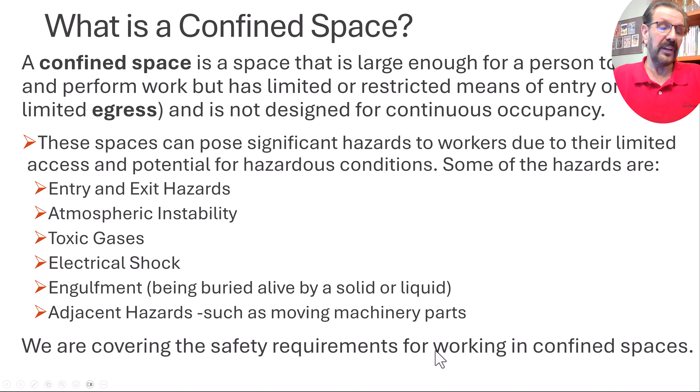Here we are covering the safety requirements for working in confined spaces. So that's our mission. So here you got a couple of people working on a rescue of somebody in a confined space, and that's an important part of this too. So the safety requirements for working in confined spaces. Well, here's that definition again.

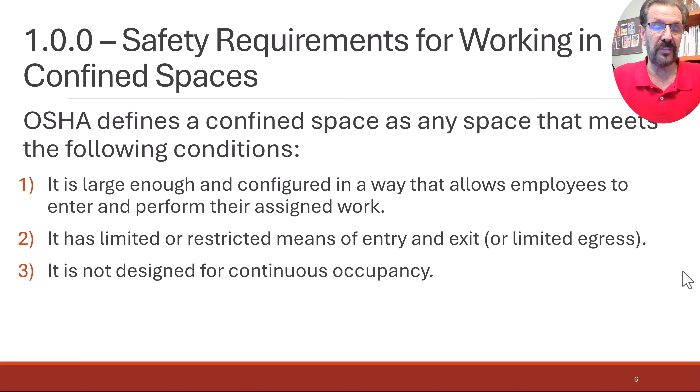Number one, it is large enough and configured in a way that it allows workers to enter and perform their assigned work. Number two, it has limited or restricted means of entry and exit, limited egress. And number three, it is not designed for continuous occupancy.

So examples of working in confined spaces: some of these spaces could be manholes or the spaces around them. You could have boilers, which somebody has to go work inside of. It could be trenches, tunnels, sewers, underground utility vaults. Well, that's really what I was talking about with the manholes, I guess. Pipelines, pits, air ducts, and process vessels.

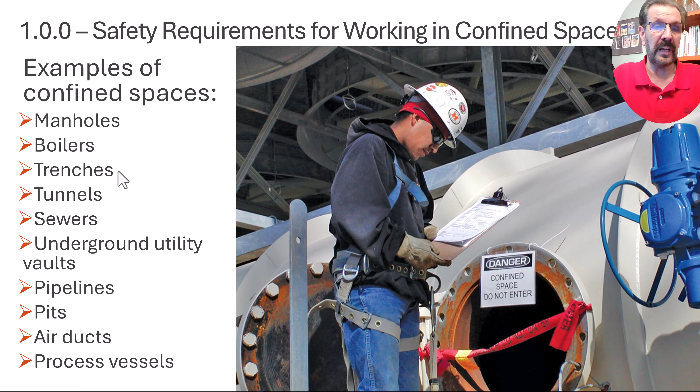Now notice that trenches is in here. We're about to talk about excavations and trenching. Well, trenches particularly, but other excavations too, can be considered a type of confined space. So we'll be discussing that in more detail next. But anyways, there are 2 basic types of confined spaces.

There's a non-permit confined space. That's a workspace free of any atmospheric, physical, electrical, or even mechanical hazards that could possibly cause death or injury. So the non-permit required confined spaces are spaces that are essentially hazard-free. Sometimes that's open to discussion or different opinions. Particularly in the petrochemical industry, a lot of spaces are considered confined spaces that might not be outside of the plants. And the second one is permit required confined spaces.

And yes, there's that abbreviation there for these two, but a permit required confined space is a confined space that has real or possible hazards. So that's the difference. There's real or possible hazards. And who gets to define whether it's a possible hazard or recognize it? Well, that depends. And so we'll get to that.

These hazards can be atmospheric hazards. There could be physical hazards. There could be electrical hazards in that confined space, or mechanical hazards. So therefore, in permit required confined spaces, the space poses real or potential hazards. So as I started to mention a moment ago,

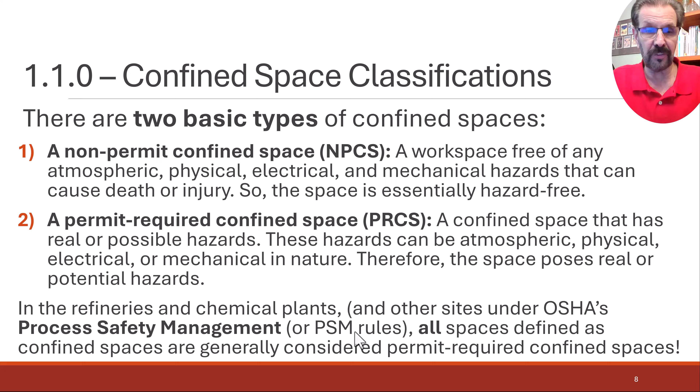So that's where the separation of that comes from. There's nothing keeping you from having a permitting process on other job sites. It just doesn't typically happen. So part of these classifications, this picture might be a good one to look at. You're supposed to have a confined space attendant outside that's managing things from outside, paying attention to what's going on down inside the confined space, down or over, wherever the location is. And then you've got the entrants that are working inside the space.

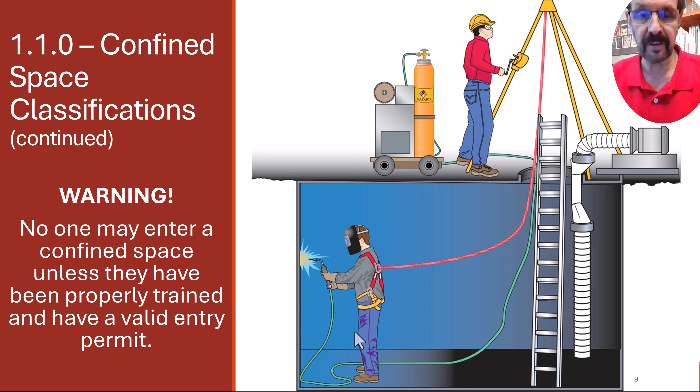And so you have to address the hazards and protect. In this particular picture, there's no respirator being worn by the one that's in there welding, because they've addressed the hazard of the gases, apparently, going by the picture, with ventilation, pushing some air into the space that is then pushing the bad air out. And if you're doing that effectively enough, then maybe that'll work. But that's what we have to address: the air quality issues are maybe one of the most important things.

So what's involved with an entry permit? Well, here are the general things that are required. Generically, there could be other things at a particular plant you're working in. OSHA does not micromanage the confined space entry permit process, but these are things that pretty much have to be on any entry permit. The first one, the description of the space and the type of work that's going to be done. And the next point, the date of the permit and how long it lasts. It usually lasts hours, not days.

The test results. For all atmospheric tests, they need to know the oxygen, they need to know the flammable gases, they need to know the toxic gases or contaminants or materials of any kind that are in those spaces. And that's the preliminary test that would be on that permit. Then you might be doing ongoing testing while people are working in there, and that would not necessarily be on the permit. But meanwhile, you need the name and the signature of the person who did that initial testing.

And then you'll have the list of the workers who are authorized to enter that space. So the people that are actually going to go in that space, their names have to be on the permit when you created the permit to begin with. Over on the second column, you have to have the means by which the workers will communicate with each other within the space and with the confined space attendant.

Any special equipment or procedures that are going to be used in that confined space have to be listed. If you're going to be doing welding, the welding equipment and the welding has to be mentioned on that permit. Any other permits that might be needed. If you're going to be doing welding in a plant, that usually means having a hot work permit for all the spark-inducing heat that could ignite any flammable gases that may be around. And so that could be one of the permits. There could be other permits required. The lockout tagout process, maybe. There could be something else.

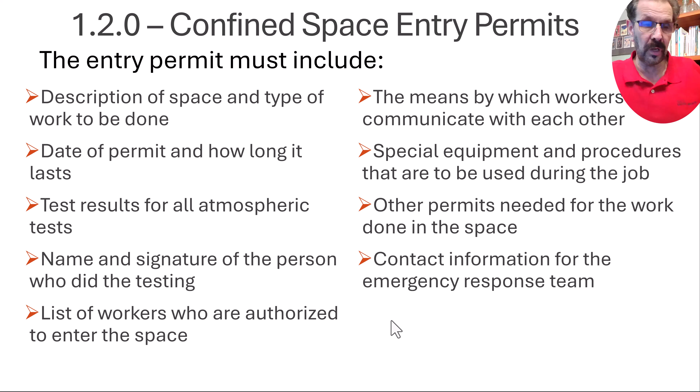And then finally, you have to have the contact information on the permit for the emergency response team. The idea is to have everything thought through that you might need for any possible scenario of hazard that comes along. And of course, this thing all has to have been signed by your supervisor who is managing that process, the confined space supervisor. So if that supervisor is heading off to a meeting somewhere, they shouldn't be the one to sign this thing, because they have to be on site ready to respond when things go wrong, when the confined space attendant hollers out, sounds the horn, whatever.

So that's the basics. Okay, here's a sample confined space permit, 2-page, front and back of it. They can be much more involved than this. This is fairly simplistic, but it's giving you a place to put the initial results from your tests before you ever get the permit signed and approved.

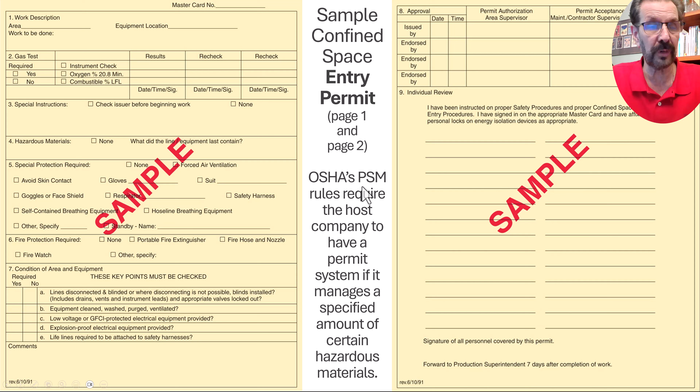OSHA's PSM rules require that the host company have a permitting system if it manages a specified amount of certain hazardous materials. So those are listed right within the OSHA standards. What quantity makes your company have to follow PSM rules?

Okay. Entry into a confined space officially begins when any part of your body passes through the plane of the opening. So sometimes people have been known to make a joke about that, knowing that rule. They stick their big toe in there. "Oh, I'm in the confined space." Ha ha ha. Yeah. And maybe that's not all that dangerous. It probably isn't most of the time.

But if your name isn't on that permit, people have been known to be fired even a week or so later, because we have to treat confined spaces very, very seriously. They're not part of the top fatalities in construction. But the only reason is because we don't spend as much time in confined spaces as we do in other kinds of work. And so that's the only reason they're not in the top 4.

You know that 2 out of the 3 people who die in confined spaces were trying to do rescues. We're trying to perform a rescue of somebody else. They can be traps. They can trap people into going and doing risky things sometimes. So violating those rules can get you fired.

The permit itself must be posted near the entrance of the confined space. When I say the entrance, it's more important that it's the exit too, of course. And the permit must be available for workers to review. So you want to make sure before you go in the confined space that you have read through the permit and you notice that your name is on the permit, that you're allowed to be in there, that you're on the list.

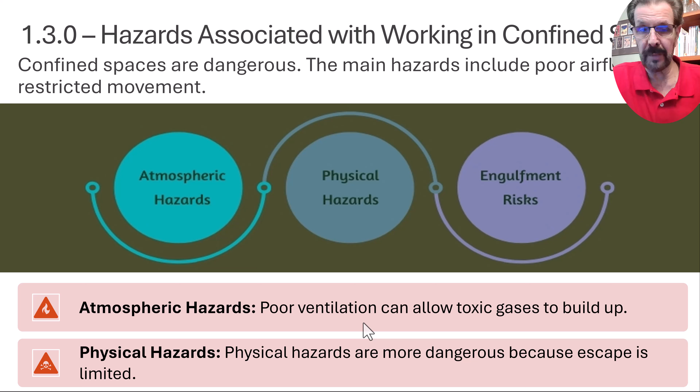So we use atmospheric meters, mostly 4 gas meters. Many of them traditionally have been 4. So atmospheric hazards such as oxygen depletion, or could even be oxygen enrichment. When oxygen in a confined space is reduced, it becomes harder to breathe. But too much oxygen in a space, that's oxygen enrichment, can make things like your clothing way more flammable than they normally would be.

So that can burn you alive, really, because all of a sudden you got a flash fire on yourself. Oxygen isn't flammable itself, but it makes everything way more flammable. And so you want to keep the mixture of oxygen in the air in your space between 19.5% by volume and 23.5% by volume. 20.85% oxygen.

Which is basically 20.9 as you see on the screen. And so we don't need to be that precise.

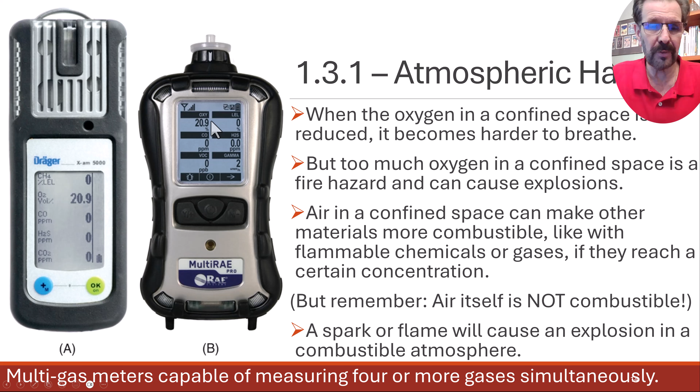Okay, so beyond that, atmospheric hazards: the toxins associated with each product used in a confined space will be found on the safety data sheets. There's other sources like the industrial hygienists have a manual, and there is the NIOSH handbook. These are all handbooks that can be used, but the ultimate guide is the safety data sheet. And so you have to look up the safety data sheet in your safety data sheet catalog or manual that is supposed to be posted at a handy place on your job site where any employee can view it.

Some toxics, such as carbon monoxide, cannot be easily detected by sight or smell. You have to use a meter. They're poison. They may be toxic, but they are not something that you can necessarily smell. So carbon monoxide and carbon dioxide are both examples of that, except that carbon monoxide is 10 times more deadly per percentage than carbon dioxide.

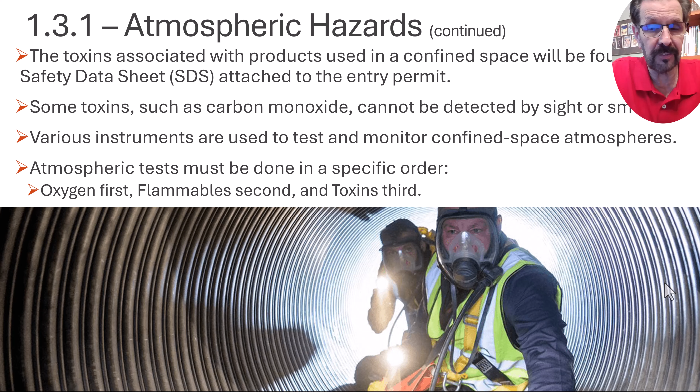So we normally test the atmosphere in this order. You see that in the last bullet and a half here. It says oxygen first, because otherwise what you're reading is not that meaningful on the meter because it's not an accurate reading. So if the oxygen isn't correct, then the flammable gases and the toxins, those numbers won't necessarily be accurate.

Okay, let's see. The physical hazards. Well, electric shock would be a physical hazard. That can occur when power tools and line cords are used in an area of wet floors. There could also be some adjacent hazards of electrical shock that might have to be locked and tagged out.

Purging. That happens when toxic, corrosive, or natural gases enter and mix with the air in a confined space. That can happen from somewhere else within the space. You could have a sludge in the bottom of a big tank that you're in that is emitting gases that are evaporating out, toxic or flammable. And so that can be a problem. It can also be leaking in from somewhere else.

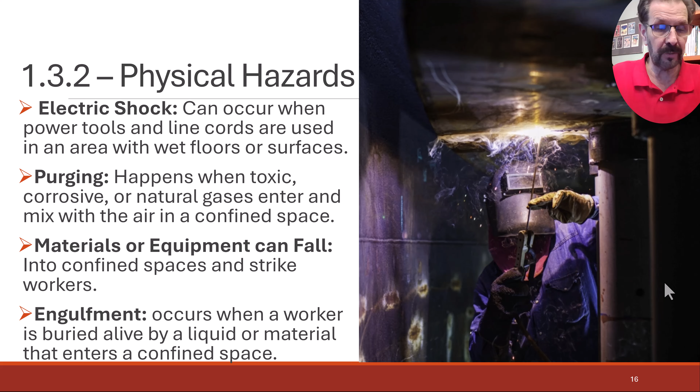Materials or equipment could fall into a confined space and strike workers. That particularly happens in excavations, but it can happen in other spaces too. And then I mentioned engulfment before. It occurs when a worker is buried alive by a liquid or a solid material that enters that space. Confined spaces that are too hot or too cold, that can be a physical hazard. Another temperature-related hazard in a confined space can be steam.

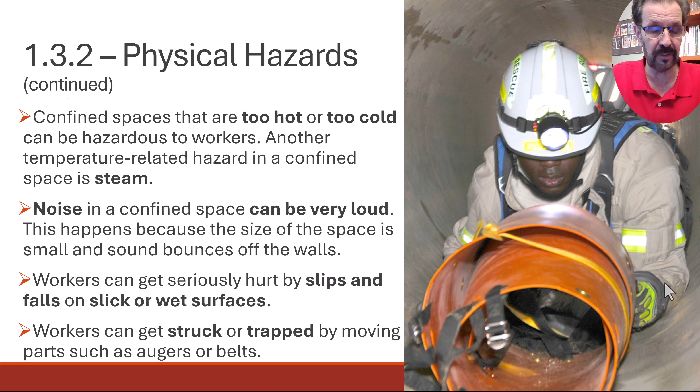And then noise is a hazard. It's just a little different kind, but that's an energy of sorts that can be very loud, so you might need hearing protection. And in a confined space, it can be amplified because it's bouncing off the hard walls sometimes. And then, of course, another physical hazard is that workers can just get struck or trapped by moving parts, such as augers or belts. That's the machinery that you might have to lock down so that it cannot afford that hazard.

But one of the problems with some of these gases is many of them have a buoyancy level to them. And so you can have gases that are heavier than air collecting near the bottom. So if you're down at your knees, you're going to be breathing different gases than you would if you're standing upright. And then maybe up at the top of the tank, you could have another gas. So you can have different gases floating at different levels, and you can't just test the air at the spot you're at. You've got to test at different elevations on an ongoing basis. And so the attendant often will be testing at different elevations with a long extension wand for the sniffer.

Everyone involved in a confined space must have special training. So the entrant's got to have training in doing the prescribed work in the space, and they've probably got to have had a medical evaluation to wear a respirator if that's what you're wearing, because not everybody can wear one. It requires a certain physical stamina to force the air in through the respirator and suck the air back, in and out. Yeah, so you get the idea. Attendants, they have training also.

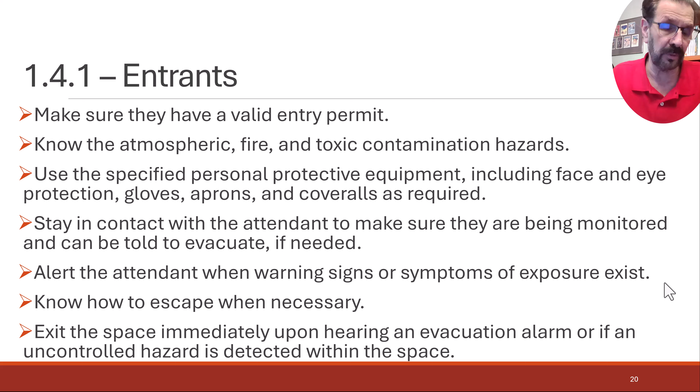Anyways, the entrant must exit the space immediately upon hearing an evacuation alarm from the attendant, or if an uncontrolled hazard is detected. So yeah, the trouble is that oftentimes when oxygen is the trouble, or the lack thereof, you don't have the good sense to get out of the space, and so that's always a problem.

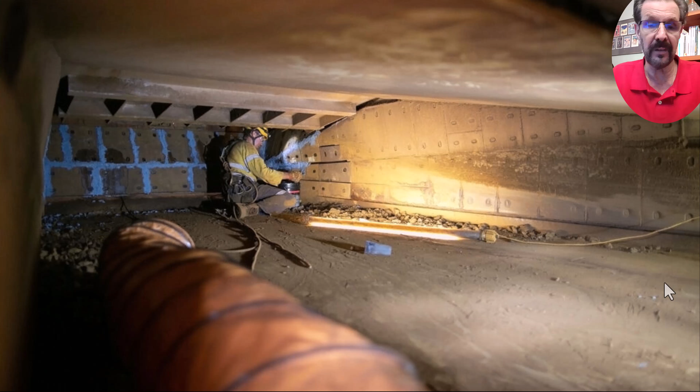Here's another confined space and not wearing a respirator. Nobody wants to wear these respirators unless they have to, but you can see the big old ventilating hoses back in here. Some of these confined spaces, you can end up in there a long ways back inside. And so there can be hazards that can make it very difficult to perform a rescue of somebody in what we call a horizontal space, where you enter horizontally into the space.

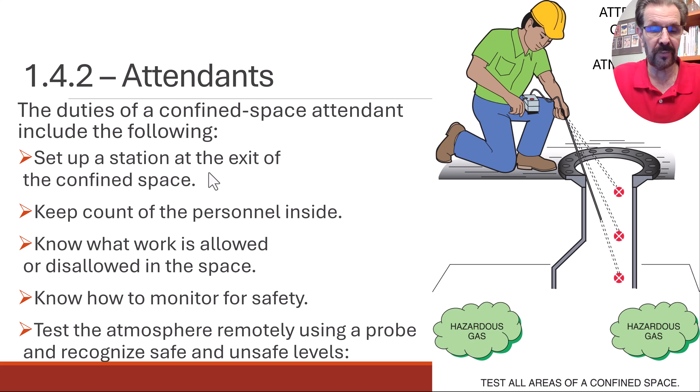You got to know how to monitor for safety. You got to test the atmosphere remotely using a probe and recognize the safe and unsafe levels. So sometimes you can peek in there, but again, if you were breathing a toxic gas that's emanating out there, that wouldn't be good either.

So it just depends. There's a rule that in a vertical confined space, anything deeper than 5 feet, where you're entering vertically down into a confined space, not like this picture, then you must set up a tripod or a hoist and actually have anybody who's in there attached to a lifeline where you can do a non-entry rescue and hoist them out.

When we're talking about entry like this picture, you really can't do a non-entry rescue usually, not easily. Maybe if it's all nicely rounded like this opening is, maybe you can, but people tend to get hung up where they cannot be rescued in that fashion.

An attendant cannot do an entry rescue. You cannot go in there to rescue somebody as an attendant. All you can do is call for a rescue team to come in. You have to be there to explain what's going on to others that are going to come and do the rescue.

As I've got listed in the bottom, I've already mentioned it, but 2 out of the 3 people who die in confined spaces are attempting to do a rescue. So think about that. That means that the original person fell down. Then 2 more people went down. They went in there to try to rescue their buddies. And finally, it took the 4th person to finally realize that, hey, I better call for help.

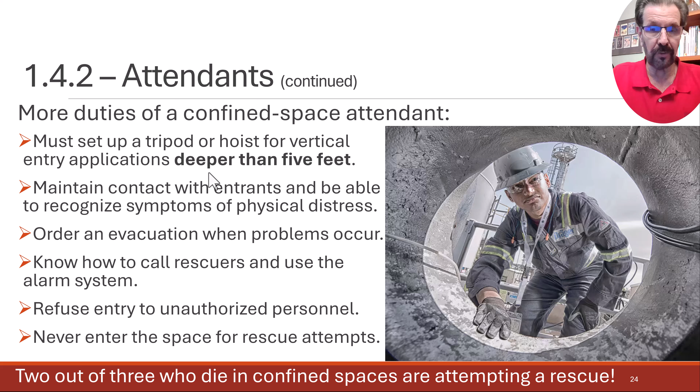So, that's how deadly these are, because you know these people, you work with them. And so when you see them down there, you want to jump in there and rescue them. And so that's why I say it's a trap. It's a real serious trap.

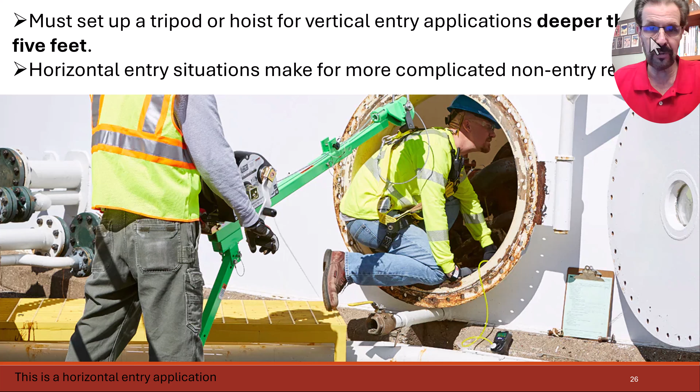So here they've got a horizontal tripod. So apparently in this particular case, they're going to be able to do a non-entry rescue. But most of the time, where it's required that you set up to do non-entry rescues is for vertical spaces. This is a horizontal space that they're going into, but what I have up at the top is really about vertical spaces. By vertical, I mean the entry into the space is from up top, like going into the manhole of a street or on the top of a tank or something of that nature.

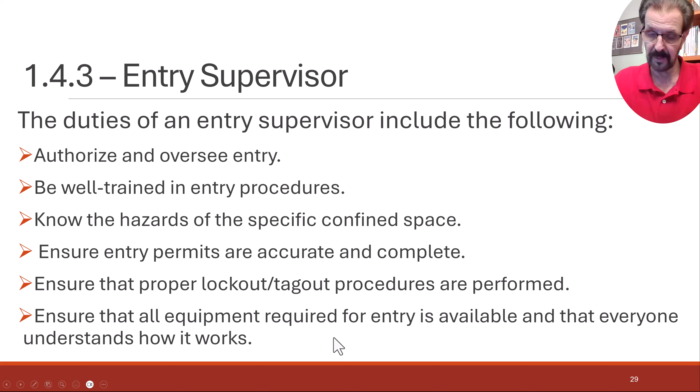So the entry supervisor will authorize and oversee the entry. They're going to be the ones signing that permit. They will be well trained in entry procedures. They will know the hazards. They must ensure the entry permits are accurate and complete. They ensure that the proper lockout tagout procedures are being performed. Ensure all equipment required for the entry is available and that everyone understands how it works so that everybody knows what's going on. So you have to manage this thing.

They also ensure workers understand the job and know the rescue plan. They've got to make sure that you know the rescue workers and you've got them on call. Be responsible for canceling entry authorization and termination when unacceptable conditions are present.

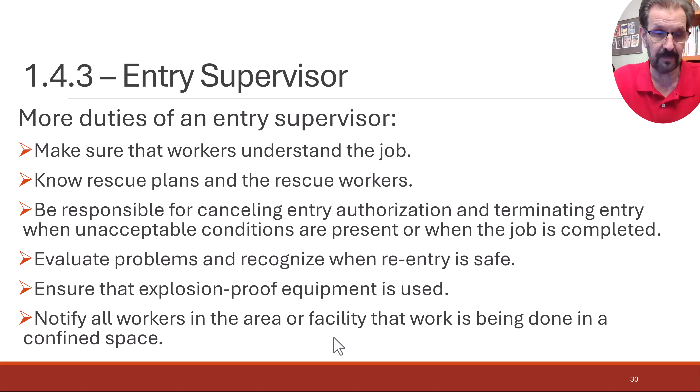Now, the attendant also can cancel the entry authorization. They can cancel the entry permit and require everybody to get out. And that could be for something as simple as lightning in the area. You better get out. There could be some other hazard, a fire that's going on outside of the space. But also, if they think there's something going wrong in the space, the slurred speech from the entrant is enough to make you decide you better cancel it and require them to get out and call the rescue team. So that's for the entrant.

So the types of rescues, I've kind of alluded to it already. The non-entry rescue, that can be done by anyone, and that certainly is the only one that an attendant on the outside of the space can do, what we sometimes call a hole watch. The confined space attendant, that's the hole watch, basically. Whereas an entry rescue can only be done by specially trained rescue workers. They're the only ones allowed to enter the space during an emergency.

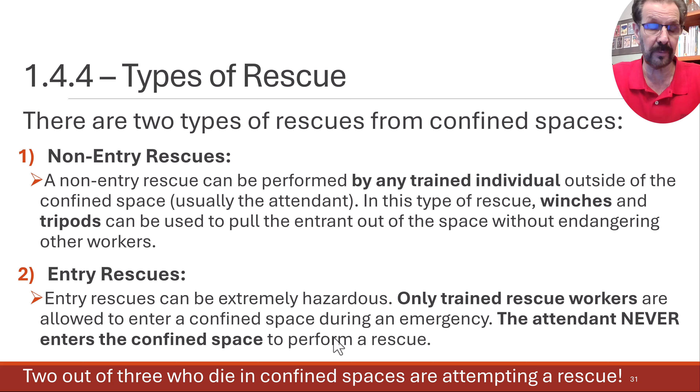The attendant never enters the confined spaces because, as you see down in the red spot at the bottom, 2 out of 3 people who die in confined spaces were attempting rescues, and that often is the attendant not following the rules and jumping in there to do a rescue, and they just pass out along with the rest of them.

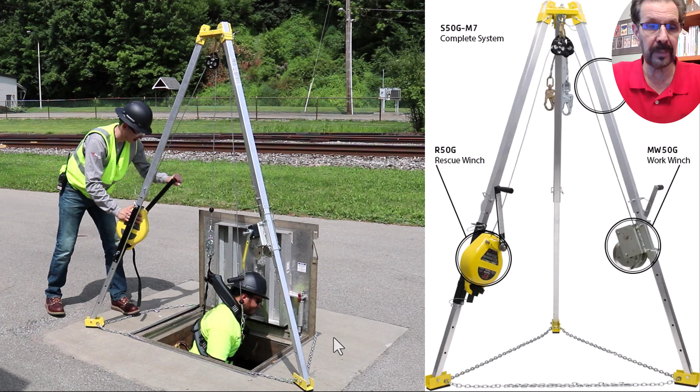So rescue workers have a responsibility to do the following: know the hazards of the confined space, which they might be reviewing from the confined space permit, know the proper use of personal protective and rescue equipment, including respirators, practice rescue operations and know how to perform those rescues, and be trained in first aid and CPR, and maybe AED training too. Know the company's confined space rescue program and rules and procedures.

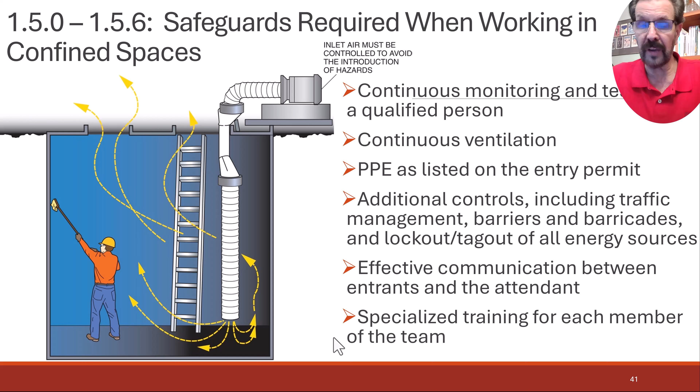So the safeguards required when working in confined space: continuous monitoring and testing by a qualified person, continuous ventilation. The PPE is listed on the entry permit. There could be additional controls, including traffic management, barriers and barricades, lockout, tagout of all energy sources, effective communication between the entrants and the attendant. That might be done with something as simple as a horn, or it might be done with walkie-talkies of some sort. There could be specialized training for each member of the team involved with this confined space operation.

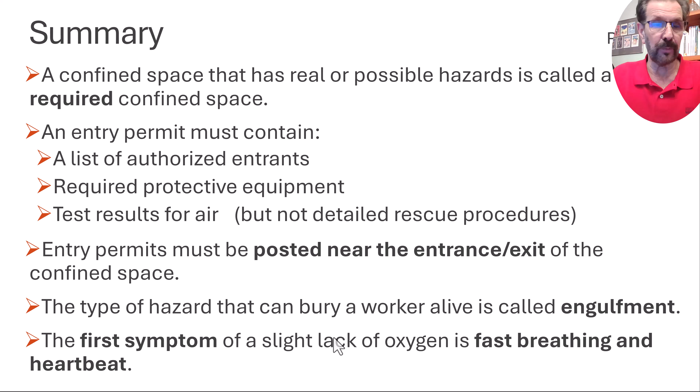Summary: a confined space has real or possible hazards, and it's called a permit-required confined space when it's got real or possible hazards. An entry permit must contain at least these basic minimum things: a list of the authorized entrants that are going into the space, the required protective equipment that you should use to go into the space, and the initial test results for the air at the beginning. An entry permit must be posted near the entrance exit of the confined space. The type of hazard that can bury a worker alive is called engulfment.

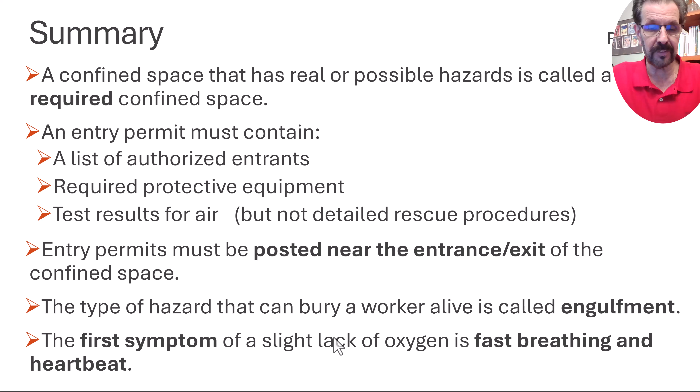The first symptom, not the final symptom, but the first symptom of a slight lack of oxygen would be fast breathing and heartbeat. That can progress to worse things, but the very first symptom would be fast breathing and a fast heartbeat. I'm just going through these lists. Oxygen-enriched atmosphere can be just as hazardous as an oxygen-deprived atmosphere. This is giving you a hint to what kind of test questions to expect. That's what the summary does.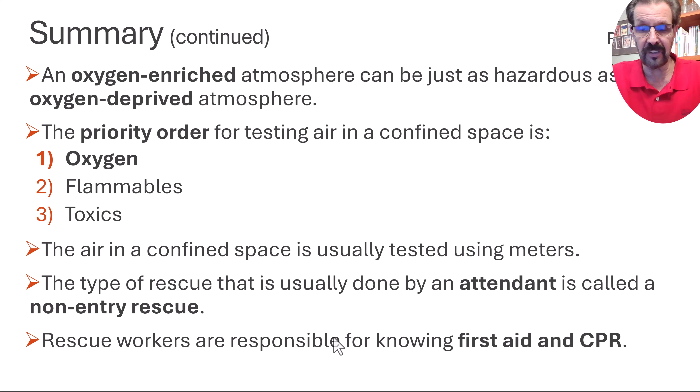The priority order for testing air in a confined space is oxygen first, then flammables, and then toxics. The air in a confined space is usually tested with meters, not canaries anymore. We don't use birds in a cage anymore, right? Okay, so you use meters. The type of rescue that is usually done by a confined space attendant is called a non-entry rescue.

Rescue workers are responsible for knowing first aid and CPR. You can have other people on the site, like you, as a construction manager or as a safety technician. It's not a bad idea to have that first aid and CPR training. Okay, so that's everything you need to know about confined spaces.